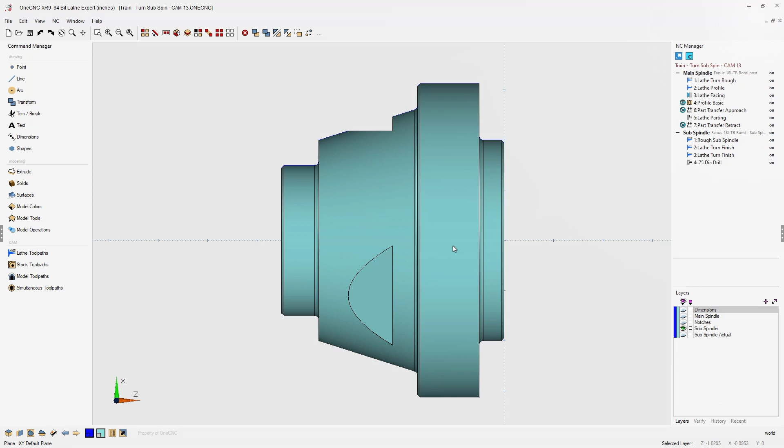In this video, why don't we take a look at creating this chamfer right here. Remember, this hole has a diameter of 750 thousandths, so that's a little bit too small to use a boring bar or boring operation to machine the chamfer. So why don't we create a chamfer tool and use a drill operation to create the chamfer.

First of all, we can head over to the left and go into our lathe toolpaths just like before, and select our drill tap cycle. Now an alternative would be to come over to the NC Manager, right-hand click, then select duplicate operation. This creates a duplicate of the drilling operation.

We know we can rename this simply by double clicking, and within the NC Processing dialog box we can type in whatever we'd like. I'm going to type in 1-inch diameter chamfer tool. That looks good, so I'll click OK to that.

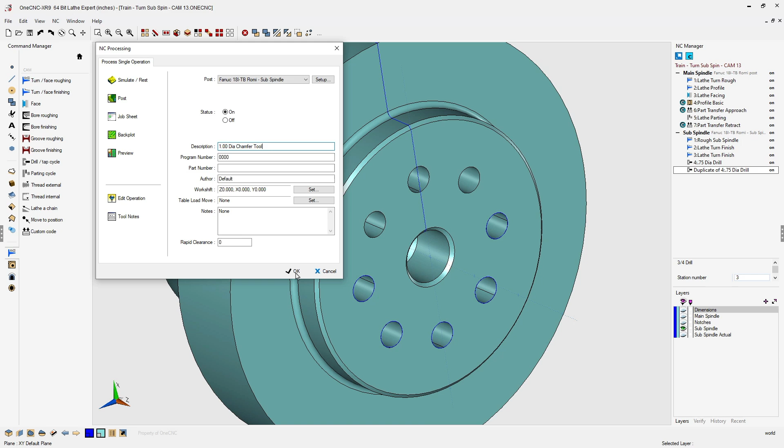Now with this drilling operation renamed, we can change some of the parameters. I should also point out that by duplicating this drill operation, we didn't have to reselect any geometry, so this can be a much faster approach when creating similar toolpaths. Let's edit this by right-hand mouse clicking and select Edit Operation.

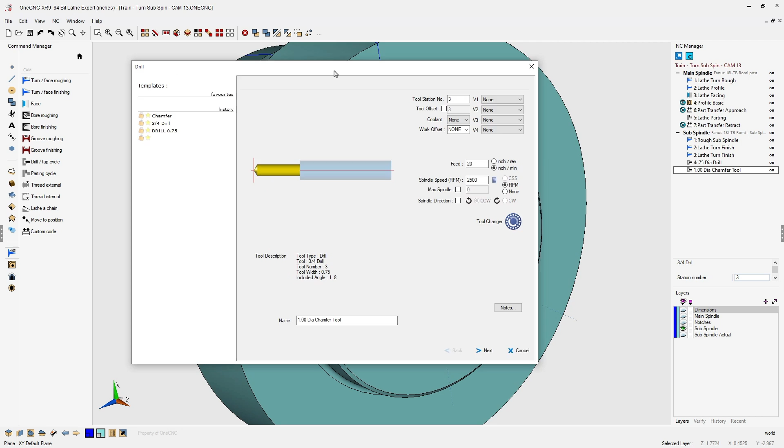Now the first thing we'll need to do is create our brand new tool. Remember, you can access the tool library by left-clicking on the tool graphic, or you can left-click on Tool Changer. I'm going to left-click on Tool Changer.

Within the Tool Changer dialog box, we have two tabs. We don't need to look at the Recent tab. From previous videos, you already know that the Recent tab contains the current tools that have been used as well as favorited tools. Let's click on Library, and from there we want to make sure we're inside the drill category.

Now I want to create a brand new tool, so I'm going to select Enable Edit Tools, and this time instead of cloning an existing tool, I'm going to click the New button. So down here at the very bottom, this is going to be our brand new tool.

Now the first column is whether I want to add this tool to our favorite list. I'm going to leave that set to yes. The second column is to give the tool a name, so I'm going to type in 1-inch chamfer. The tool number, this is the default turret position.

You can enter a value here if you'd like, or leave it at the default of 0. This turret position or tool number can always be changed within the machining operations. The library number is just an internal library number. We can assign this tool as tool library number 2, and later if we want to search for that, we definitely could. I'm going to leave this set to 2.

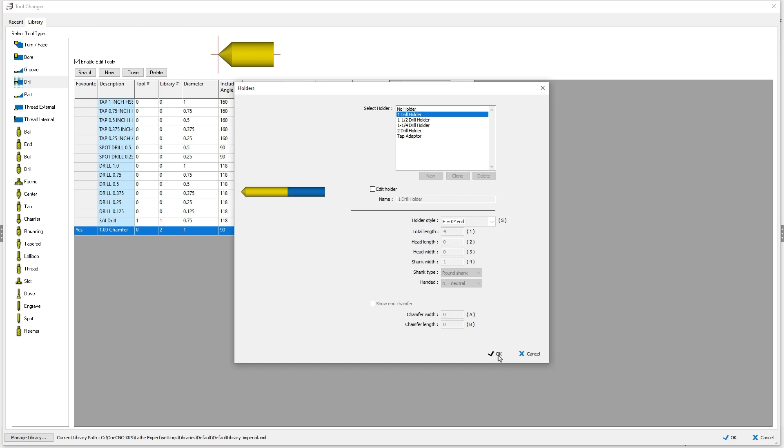As far as the holder goes, I'm going to use the number 1 drill holder. To access the tool holder library, simply left click here, and from there you can create a brand new tool holder or select a previously defined holder. I'm going to use the number 1 drill holder. That looks good. Let's click OK to that, and with this selected we can now click OK.

Very good. So here's the graphic of the chamfer tool, and down here is all the technical or relevant information for that tool. Let's put this tool in turret position number 4. Don't need to worry about the tool offset, as OneCNC is going to use the same value as tool station number. If you want to change it, just click and type in whatever value you want.

Don't need to worry about coolant work offset, as the post-processor defaults will take care of that. For feed rate, I'm going to make sure again I'm using inches per minute, and for this I'm going to reduce this down to 15 inches a minute.

I'm going to leave the RPM at 2500. Make sure we have RPM selected. I don't need to override the spindle direction, so I can leave that unchecked. As far as the name goes, we've already named the machining operation to 1-inch diameter chamfer tool, so I'm going to leave that alone, and I don't need to add notes which would appear inside of the CNC program, so I can leave this option alone.

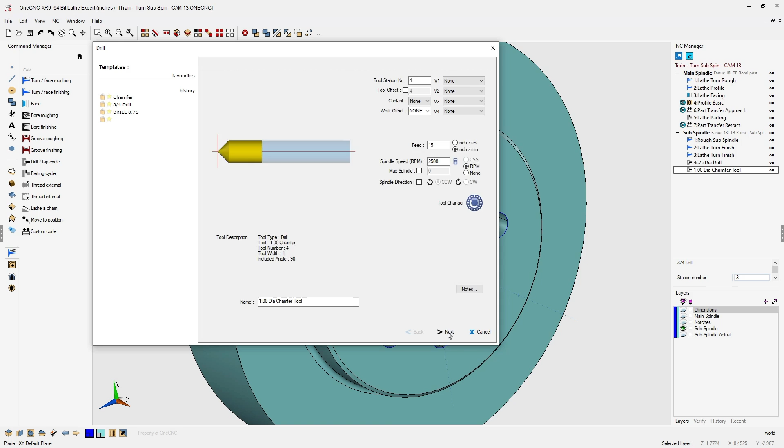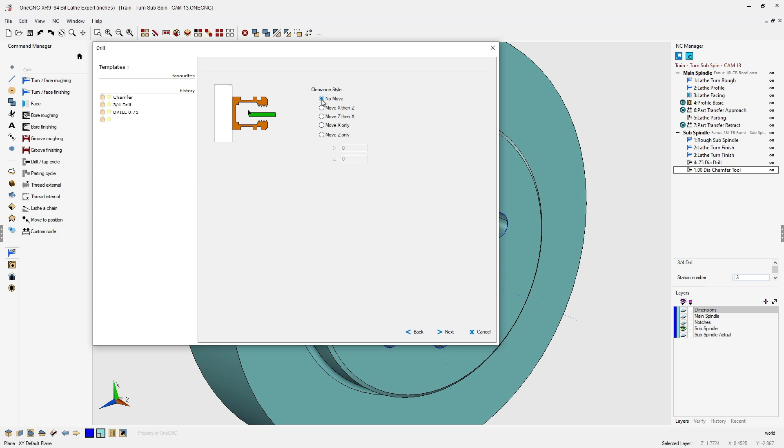Let's click Next on that. Don't need to worry about the clearance style. Remember, the clearance style is how the tool is going to move away from the part geometry after the machining operation. Typically, 95% of the time, you'll never need to change that. It's only when you're performing more complicated toolpaths that you might want to change the way the tool exits or moves away from the part geometry.

Let's click Next on that. For this, I'm just going to be using a standard type of drilling operation. In other words, I want the chamfer tool to go in and then pull out. If you want, you could add a dwell value. This is in seconds, so if I type in 1, that's going to dwell at the very bottom of the chamfer for 1 second. I don't think we need that, so I'm going to put this back to 0.

The Z clearance at 200 thousandths is fine. The entry and overcut amount, we can leave these values alone as we can modify that down here. Now Z start, this is where the chamfer tool is going to start feeding.

Z end is very important, and here's an easy way to get the exact size chamfer that you want. Whenever you're using a 90-degree included angle chamfer tool, you can use this technique. If you type in the radius of the hole, remember our hole is 750 thousandths in diameter, correct? So if I type in minus 375 thousandths, that value will not give us a chamfer, but it will move the chamfer tool all the way in to the very side of the chamfer tool, becomes tangent to the edge of the hole. Again, it won't give us a chamfer, but it's just barely going to kiss the edge of the hole that's been drilled.

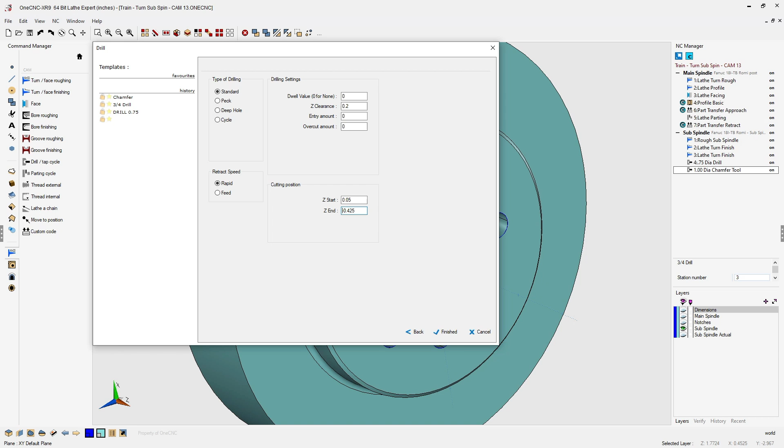Now, if I want to add a chamfer amount, all we have to do is add that to this. Now, because it's a negative value, you're going to want to type in a minus here. And if we want a 50 thousandths chamfer, we just type in minus 0.05. Now, if you hit the equal sign on the keyboard, OneCNC will add those two together while retaining that minus sign. So if we were going to cut using a 90-degree included angle chamfer tool at minus 425 thousandths on a 3/4 inch diameter hole, that's going to give us a 50 thousandths chamfer.

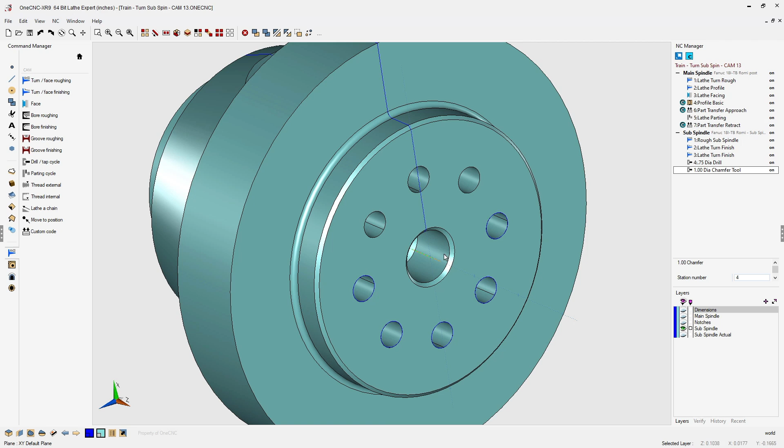All right, I think that looks good. Let's click Finish and let OneCNC generate the toolpath. Very good, and we can see the machining operation has been added here.

Let's go ahead and end the video by simulating our toolpath. I'm going to right-hand mouse click on the toolpath group and select Simulate Rest. From here, we're going to define our stock. I'm going to be using this option called Round Bar. It should be noted that you can also use a solid model that you may have created previously for the stock, but for this, let's just keep it simple and use Round Bar.

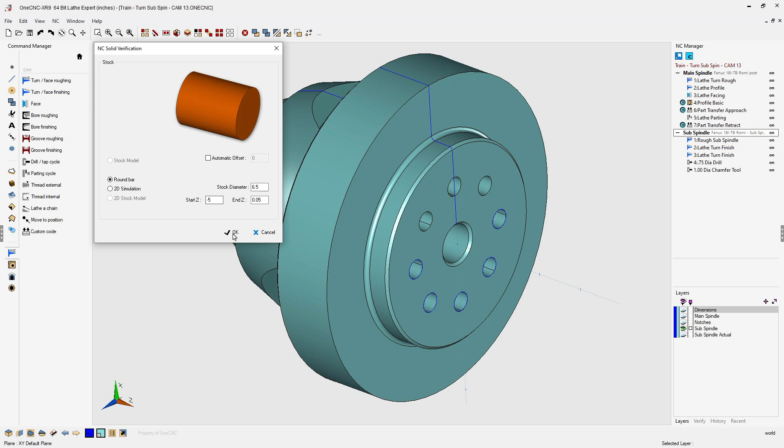For the stock diameter, I already have 6.5 inches. I'm going to say the very beginning of the stock is at Z 50 thousandths and the very end of the stock is at minus 5 inches. Let's click OK and let OneCNC simulate the toolpath.

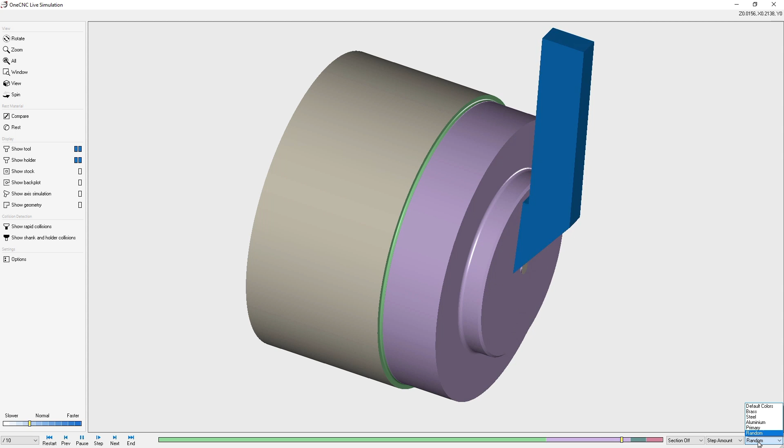Now, instead of using random colors for each tool, you can actually make the colors more consistent by coming down to the lower right-hand corner and selecting this button. This button gives you the ability to change the way the tools will be displayed, in other words, their color. I'm going to change this to aluminum, and then I'm going to click Restart. Now, if I speed up the toolpath simulation, you'll notice that the tools now have a very similar color. There's our drilling operation, and there's our chamfer operation.